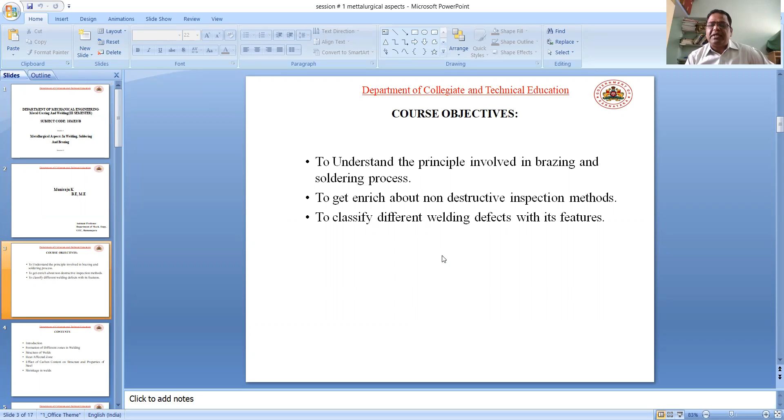Initially I will list out some course objectives. First, to understand the principles involved in brazing and soldering process. Second, to get enriched about non-destructive inspection methods. Third, to classify different welding defects with their features.

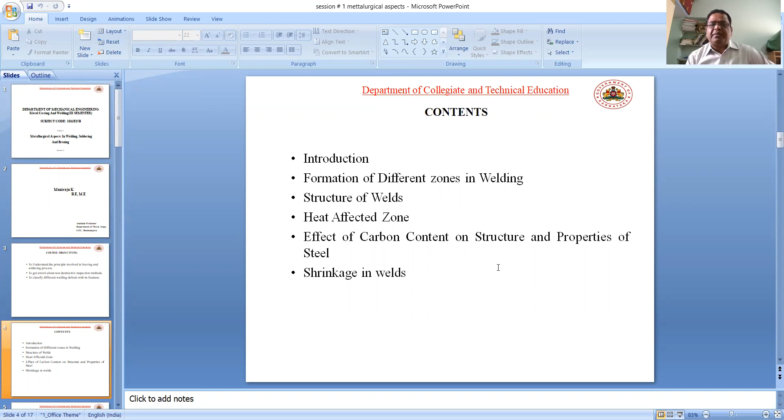Contents: introduction, formation of different zones in welding, structure of welds, heat affected zone, effect of carbon content on structure and properties of steels, shrinkage in welds.

First, stating formation of different zones in welding. You can see the diagram, the different zones are drawn. During welding, when the heat interacts with the workpiece material, the flow of temperature in different materials varies from region to region, resulting in three distinct regions or zones.

They are the fusion zone, heat affected zone, and unaffected base metal zone. In the diagram you can see the weld bead - on the weld bead, it is called the fusion zone. Near to the fusion zone, that dotted area is called the heat affected zone, which is always very near to the fusion zone. Apart from fusion zone and heat affected zone, after the heat affected zone this is called the base metal zone. So these are all the different zones in welding.

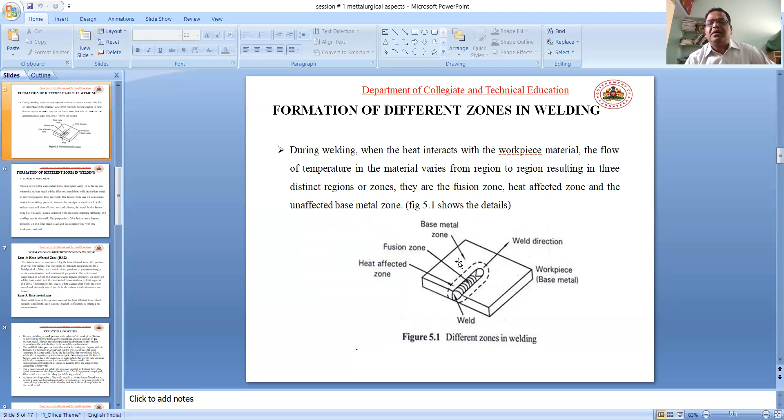We will take the first one, fusion zone. Fusion zone is the weld metal itself - it is the welded area. More specifically, it is the region where the molten metal of the filler rod combines with the molten metal of the workpiece to form a weld. The fusion zone can be considered similar to the casting process.

In the casting process, molten metal is converted into solid metal. We pour molten metal into the designed shape and allow it to solidify. In the same way, here the molten metal of base plate 1, base plate 2, and filler rod combine and convert into a solid part, wherein the workpiece metal reaches the molten state and then is allowed to cool. Hence, the metal in the fusion zone basically has a cast structure with microstructure reflecting the cooling rate in the weld.

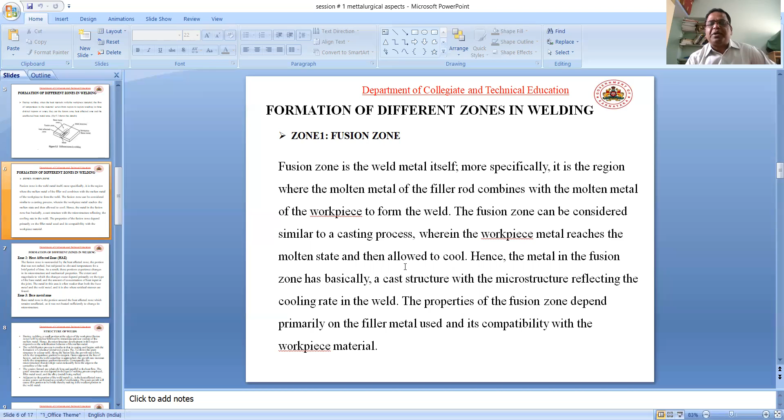The properties of the fusion zone depend primarily on the filler metal used and its compatibility with the workpiece material. The microstructure depends on the filler rod metal and workpiece metal combination or compatibility.

Next, zone 2: heat affected zone, simply called HAZ. The fusion zone is surrounded by the heat affected zone. This is the portion that was not melted but was subjected to elevated temperatures for a brief period of time.

The area where heat is not in direct contact but is subjected to some elevated temperature - that area is called the heat affected zone. As a result, these portions experience changes in their microstructure and mechanical properties. The extent and magnitude to which changes occur depend primarily on the type of base metal and the amount of concentration of heat input at the joint.

The metal in this area is often weaker than both the base metal and weld metal, and it is also where residual stresses are found. Residual stresses are the stresses which remain in the weld metal when the external forces are removed - that is called residual stresses.

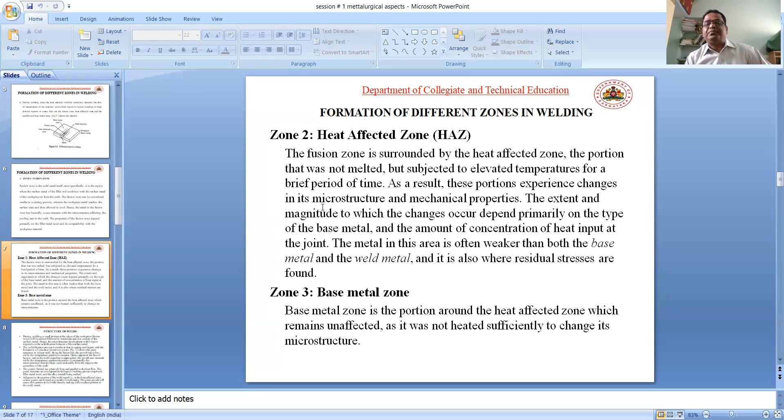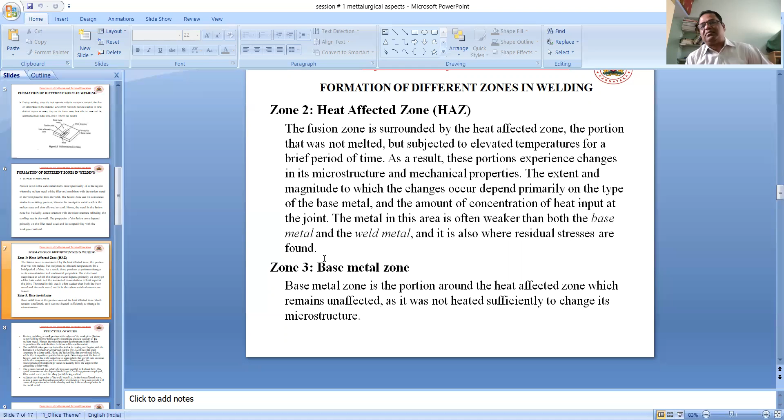Zone 3: this is called the base metal zone. The base metal zone is the portion around the heat affected zone which remains unaffected, as it was not heated sufficiently to change its microstructure. This is the normal area in the welded plate, because the amount of heat passed is less and it does not change its microstructure. That is called the base metal area.

In the heat affected area or HAZ, the grain shape is coarse grains. But in the fusion line, the grains are long and columnar, starting at the edge of the fusion line and moving towards the center of the welded area.

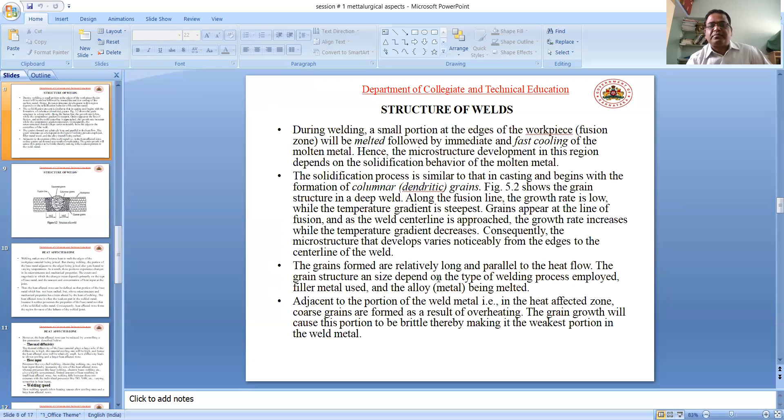During welding, a small portion at the edges of the workpiece, the fusion zone, gets melted, followed by immediate and fast cooling of the molten metal. Hence, the microstructure development in this region depends on the solidification behavior of the molten metal. The solidification process is similar to that in casting and begins with the formation of columnar or dendritic grains.

Along the fusion line, the growth rate is slow while the temperature gradient is steepest. Because the heat input is more, the grain growth rate is low.

Grains appear at the line of fusion as the weld center line is approached. The growth rate increases while the temperature gradient decreases.

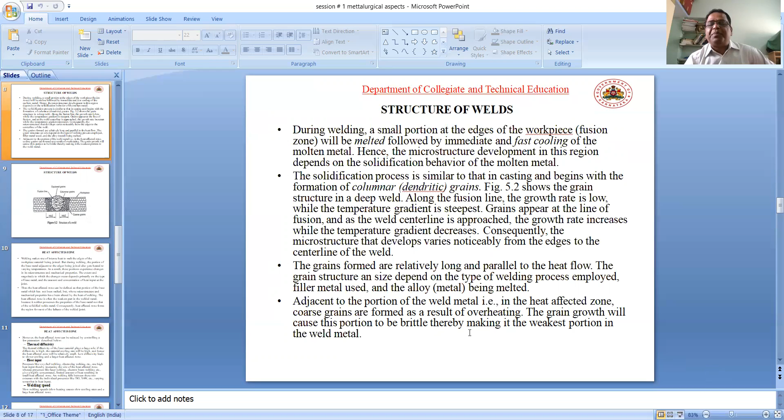You can see the grain growth, where coarse grains are formed. This makes the HAZ area brittle and weakest. In the diagram you can see the coarse grains, the long grains, the HAZ and the fusion line. This is called the structure of a weld.

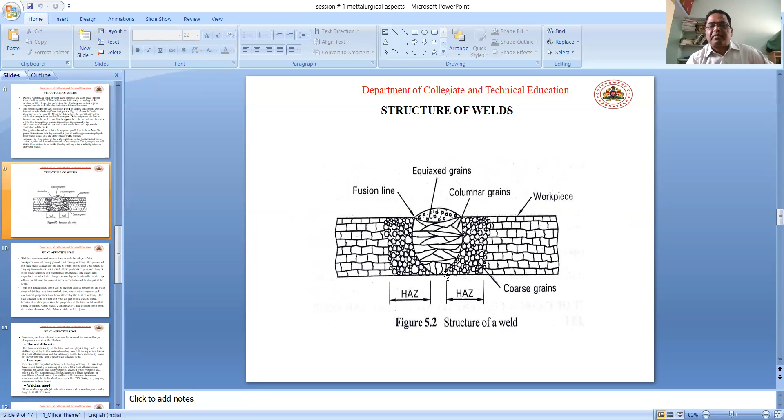Next we'll take up the heat affected zone. As I mentioned, the heat affected zone is brittle and weakest.

Welding makes use of intense heat, a large amount of heat, to melt the edges of the base metal workpiece being joined. But during welding, the portion of base metal adjacent to the edges being joined also gets heated to varying temperatures.

As a result, these portions experience changes in microstructure and mechanical properties. The extent and magnitude to which these changes occur depends primarily on the type of base metal and the amount and concentration of heat input at the joint.

These microstructural and mechanical property changes depend on the extent and magnitude to which changes occur, primarily based on the type of base metal - whether it's steel, iron, etc. - and the amount and concentration of heat input or heat supplied to the joint.

Thus, the heat affected zone can be defined as that portion of base metal which has not been melted but whose microstructure and mechanical properties have been altered by the heat of welding.

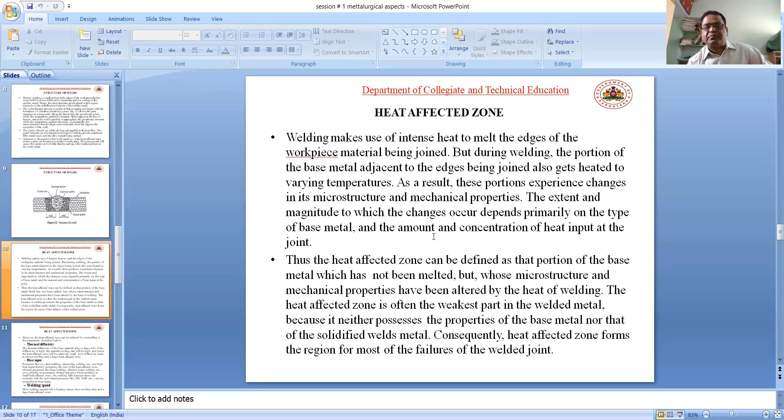However, the heat affected zone can be reduced by controlling a few parameters described below. The first one is thermal diffusivity. The thermal diffusivity of the base material plays a major role. If the diffusivity is high, the material cooling rate will be high, and hence the heat affected zone will be relatively small. Low diffusivity leads to slower cooling and a larger heat affected zone.

Next is heat input. Processes like oxy-fuel welding and electroslag welding use high heat input, thereby increasing the size of the heat affected zone. So some welding methods or processes use high heat energy, and this increases the heat affected area.

Whereas processes like laser welding and electron beam welding give a highly concentrated and limited amount of heat, resulting in a small heat affected zone, since the heat energy used is less. So that heat affected area is also less.

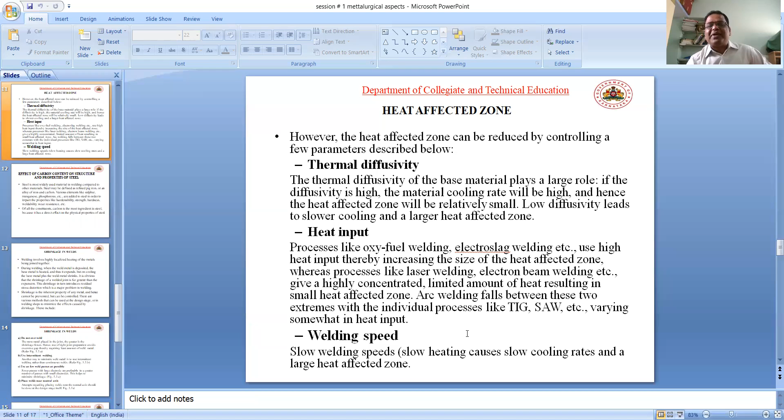Next heading is effect of carbon content on structure and properties of steel. Steel is the most widely used material in welding compared to other materials. Steel may be defined as refined pig iron, or an alloy of iron and carbon.

Various elements like sulfur, manganese, phosphorus, and etc. are added to the steel in order to impart properties like hardenability, strength, hardness, weldability, and wear resistance. So steel is a refined form of pig iron, or an alloy of iron and carbon, and various elements are added to increase these mechanical properties.

Of all constituents, carbon is the most important ingredient in steel because of its direct effect on the physical properties of the steel. Welding involves the steel.

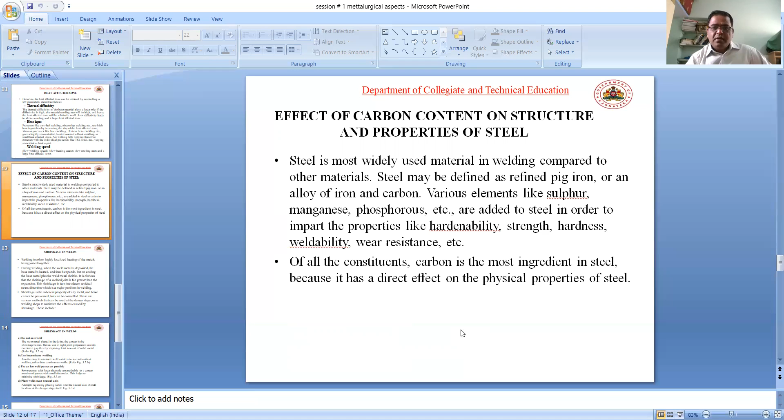Next heading is shrinkages in welding or welds. Welding involves highly localized heating of the metals being joined together.

During welding, when the weld metal is deposited, the base metal is heated and thus it expands. But on cooling, the base metal plus weld metal shrinks. It is obvious that shrinkage of welded joints is far greater than the expansion. This shrinkage in turn introduces residual stresses and distortion, which is a major problem in welding.

Shrinkage is an inherent property of any material and hence cannot be prevented, but it can be controlled. There are various methods that can be used at the design stage or in welding shops to minimize the effects caused by shrinkage.

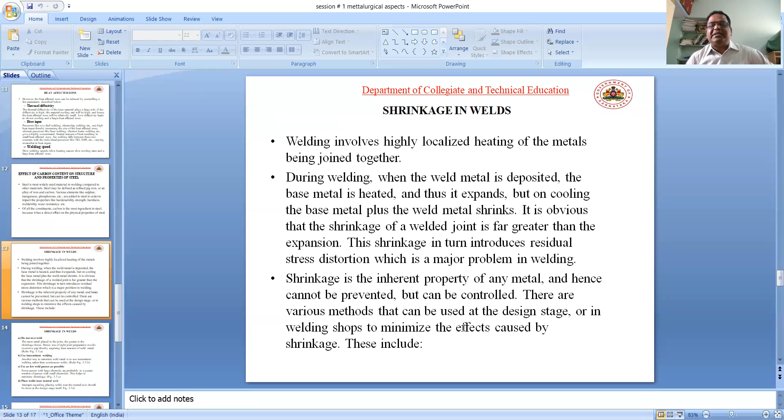This includes: do not over weld; longitudinal shrinkage; transverse shrinkage; angular shrinkage. Like a cloth, the material is also going to shrink. These are inherent properties of any material, so it cannot be prevented, but it can be controlled by various methods, the first of which is do not over weld.

You should not over weld. That means the more metal placed in the joint, the greater the shrinkage forces, because shrinkage is caused by these forces. If we supply more heat energy or weld metal, greater is the shrinkage forces, and hence use of proper joint preparations avoids excessive gaps, thereby requiring the least amount of weld metal.

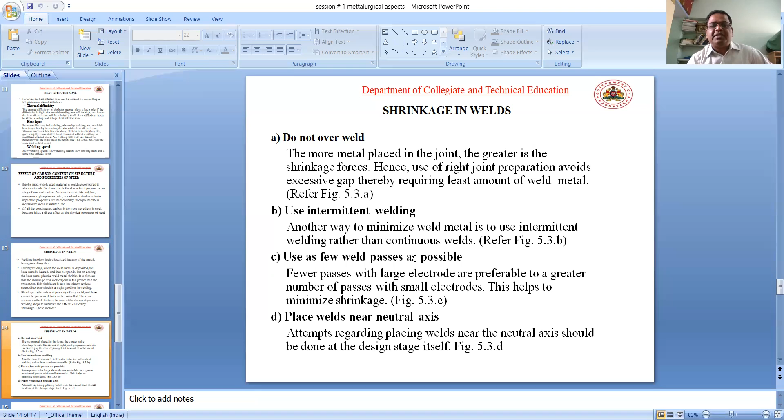To avoid this, we need proper joint preparation, like U shape or V shape joints on the sides to be joined, prepared according to the design, such as a 30-degree or 60-degree angle. So a right joint design gives less weld, avoiding over weld.

Next point is: use intermittent welding. Another way to minimize the weld metal is to use intermittent welding rather than continuous welding.